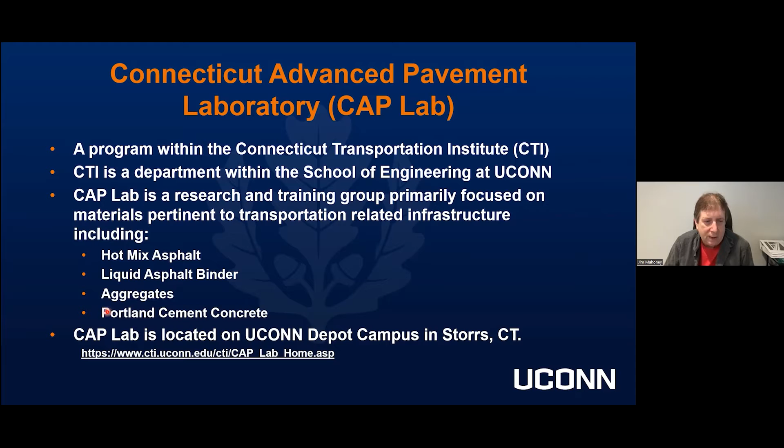So go ahead, Alex. So what's the asphalt industry that we're talking about here? What we're talking about here is these are the folks that produce the aggregates that are used to make our roadways. There's sand, there's stone in it. And these aggregates are used for paving. They're also used for concrete. They're used for a lot of different construction opportunities. And so we have the production of the aggregates.

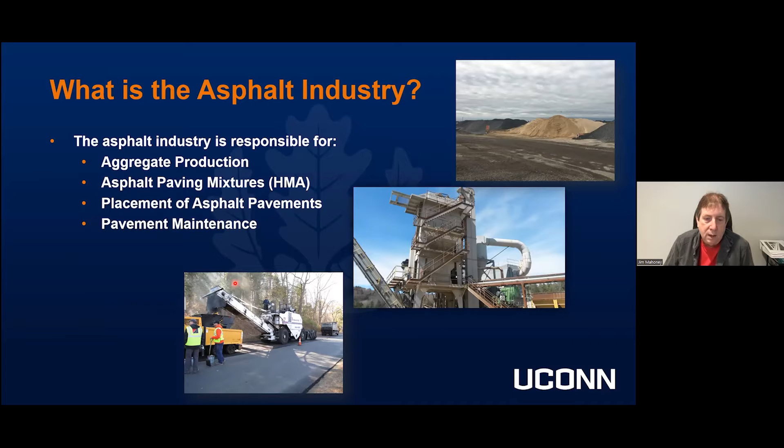And being compacted, and you're actually able to drive over it. And then beyond that, there's also the maintenance operations. So we place this material, and then we have to maintain it over the years to ensure that it is going to hold up and be able to provide a reasonable driving surface. So there's a lot of work that goes into this.

Go ahead, Alex. So just some interesting facts about asphalt. It's the most widely used construction material in the world by at least a factor of 10, if not a factor of 100 times more than any other material in the world. Asphalt's almost 100% recyclable. Not too many things in the world can claim that, but asphalt is essentially 100% recyclable. So therefore, it is a sustainable material.

Another thing people don't really guess is that the actual carbon emissions from asphalt production are much less than from producing concrete. Concrete production to make cement requires a lot of energy, so you have to burn a lot of fuel to do it. Asphalt requires a lot less fuel to produce. Even though we're placing it at about 300 degrees Fahrenheit, the amount of energy required is much less.

Asphalt's also a naturally occurring substance. You can actually find it in rocks and things like that. It is not some manufactured man-made product. It's actually a naturally occurring substance that's been used by humans for thousands of years. Everybody views asphalt pavement as a detriment to the world, but in actuality, we're just using all natural materials to produce our roads.

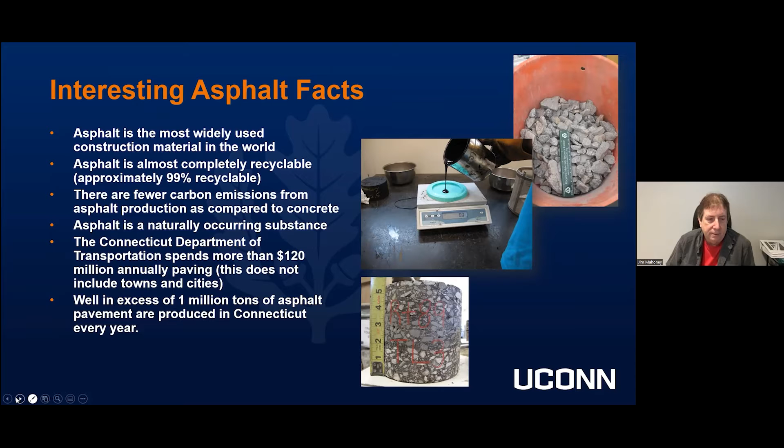It's important to understand that our roadways have to be in good shape because our economy is dependent on that. You've all driven on roads that are in bad shape, bumpy, with a lot of potholes, and that's always a problem. If we want to be able to get goods and services moved with minimal delays, we need our roads in good shape, and that helps translate to a healthy economy.

Imagine if we're so used to being able to order things from Amazon or whomever and have them delivered within a day or two. Well, that's all because we have a good road network, and we need to keep that road network in good shape so that all these products and goods can be delivered and utilized in a timely, efficient manner.

We also want to have good roads because it promotes safe driving. People swerving to miss potholes and things like that a lot of times cause crashes on our roads, which is obviously not good. We want to avoid that.

Just to give you a little more detail on how many miles of roads there are in the state, the DOT in Connecticut maintains close to 4,000 miles of roads, and municipalities maintain 17,000 miles of roads here in Connecticut. And we're a tiny little state, about a rectangle that's 100 miles wide and about 50 miles tall. So there's a lot of roads and a lot of money spent on this stuff.

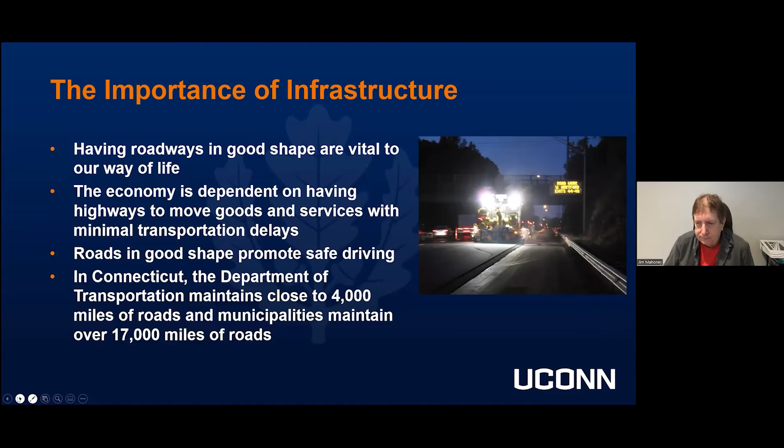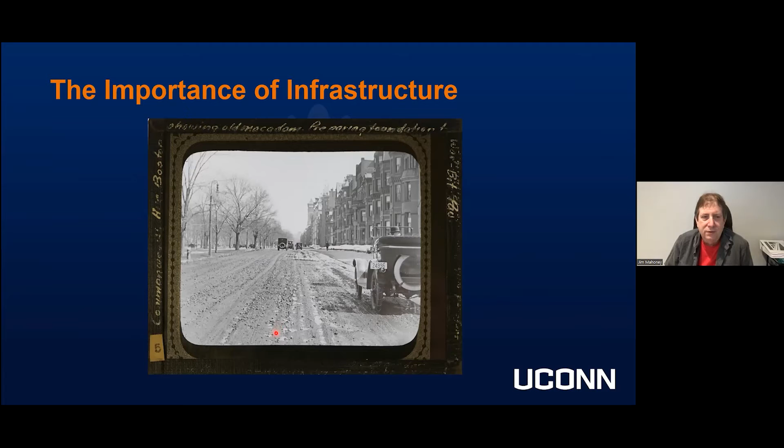They bet who could drive from out in Washington to New York State and get to New York City first. It took the fastest person 91 days. Now if you wanted to drive from here to California, you could do that in 3 or 4 days. But it took them 91 days to go from the West Coast to the East Coast. So it's an important thing, and it takes a lot of money and a lot of time to do that.

So what is asphalt that we're talking about? When you're driving on it, what you're seeing is really a combination of sand and stone held together by the black gooey stuff, otherwise known as asphalt binder. When we produce this, we're mixing these things together, adding the asphalt binder, and creating a mixture known as hot mix asphalt. That's what our roads are paved with.

We want to make sure we're blending those things correctly and putting it down, getting good quality materials out there so the roads will last. Because as taxpayers, we don't like to pony up money to have a road paved only to have it fall apart in 4 or 5 years and full of potholes. So we want to make sure we're getting the biggest bang for our buck that we can.

To give you an idea what a pavement consists of, it's about 90% sand and stone, another 5% asphalt binder, and about 5% air voids. That's what a pavement consists of, and that's what we're trying to ensure when we're doing quality control, to make sure this blending is being done correctly.

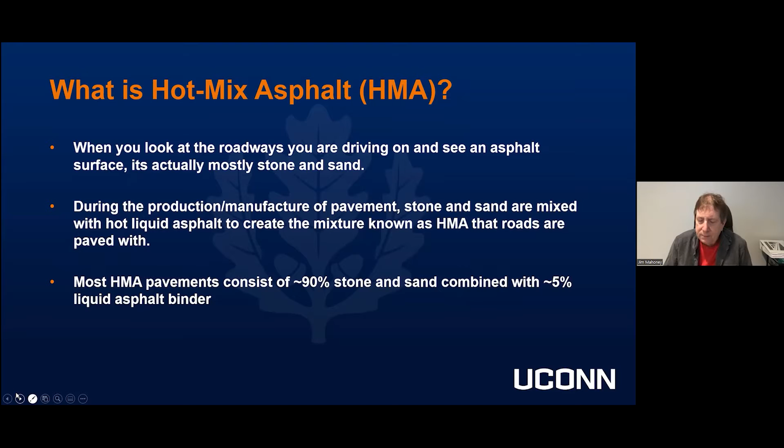And then we allow the road to open to traffic, and therefore we roll forward that way. So there's a lot that goes into this, and there's a lot of opportunities here.

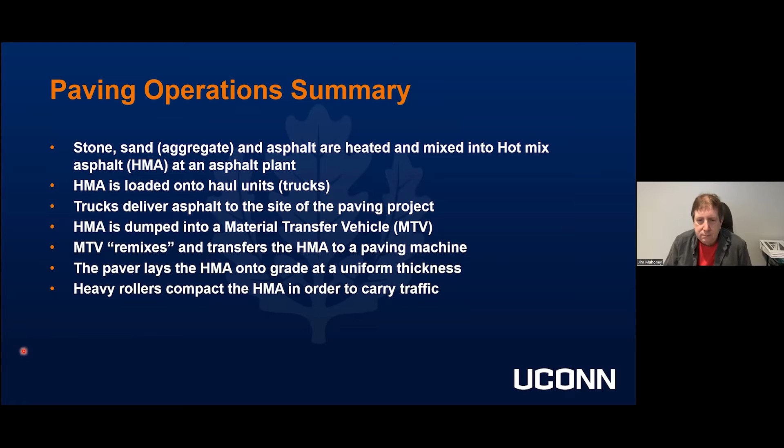I don't know when I'm supposed to drop off, Alex, so just jump in when the time comes. Scott? Oh, this is where I come in? Okay, no, sounds good. Okay. All right, so it's no problem.

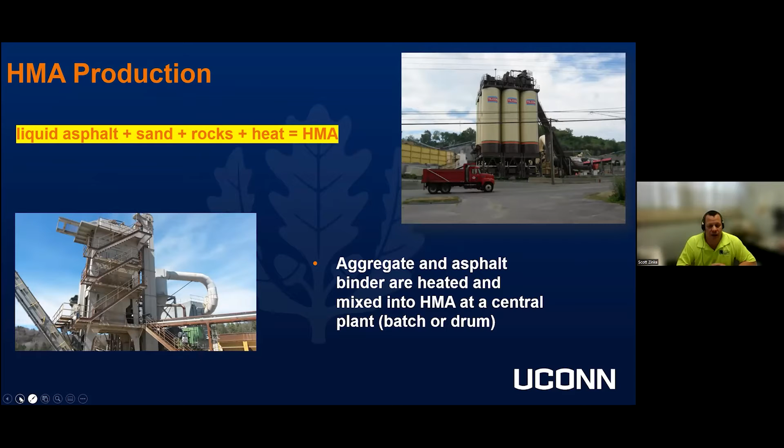Later on in this course, you'll learn the difference between a batch plant and, over on the right-hand side, what's called a drum plant. They both essentially do the same thing. We put in rocks and asphalt and use heat, mix them all up, and what we get out of it is the hot mix asphalt that gets delivered to the job site. They both put out the same thing, it's just that there's a different mechanism, different mechanisms and different functions to get there. But nonetheless, both of these types of plants, this is really interesting, the inputs are the same and the output is the same.

These are facilities dedicated to combining the asphalt binder, liquid asphalt binder, and the sand and rocks, and then using heat to dry those materials out and ultimately heat them up to get them to mixing and compaction temperature.

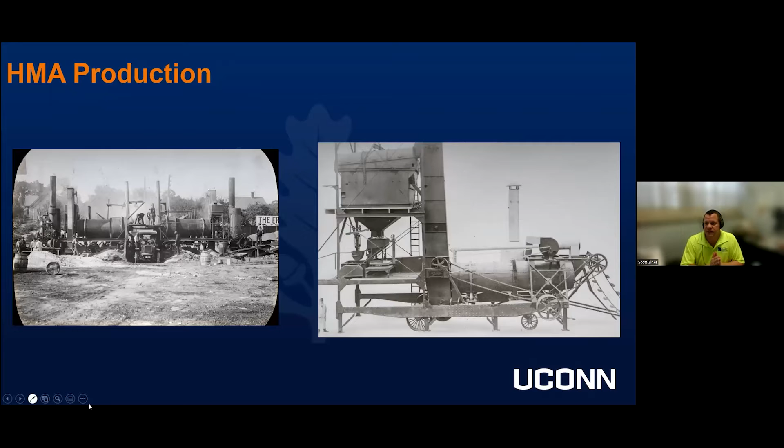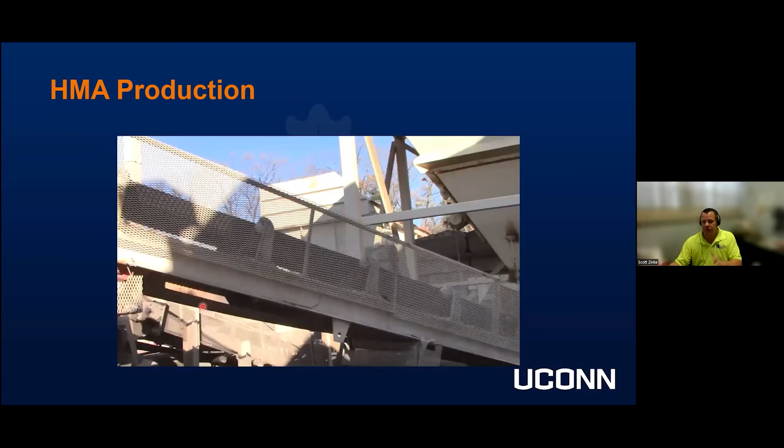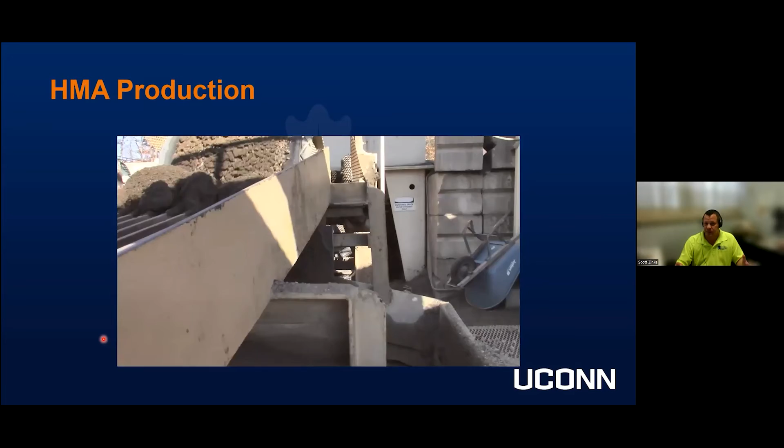There's a lot of different elements to these production facilities. If you take a look at how the stone, aggregates, and everything moves through the facility, most of the actual production is dealing with the aggregate, the stone, the sand, and the fact that it has moisture in it that needs to be dried out and heated up to really hot temperatures, in excess of around 300 degrees.

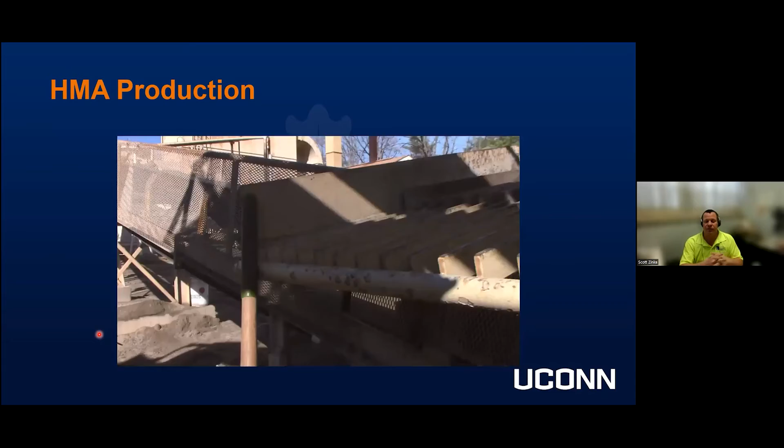We can't just have a bunch of sand and stone thrown into the mix. It's got to be the right proportions prescribed by a design process. If we don't get the correct proportioning, we're going to end up with an HMA pavement compacted into the field that simply won't last.

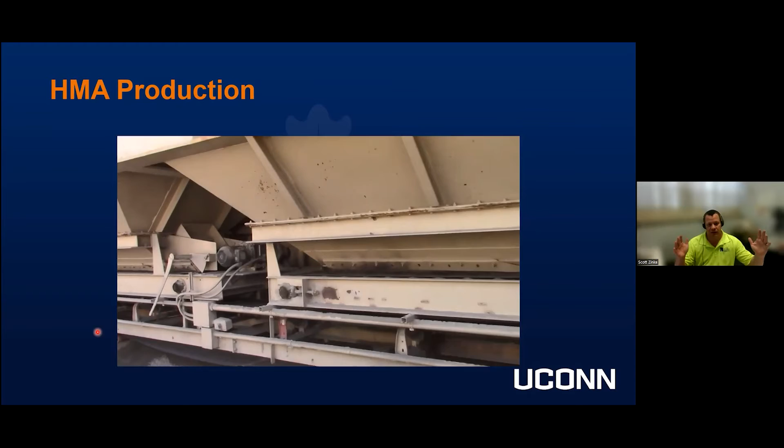So we design these things, and we are dependent on these production facilities. You're looking at the outside of the aggregate delivery system of the plant right now. If we don't get the correct proportions, if that plant can't be depended on to put everything together the way we need it, we're simply not going to get a roadway that lasts.

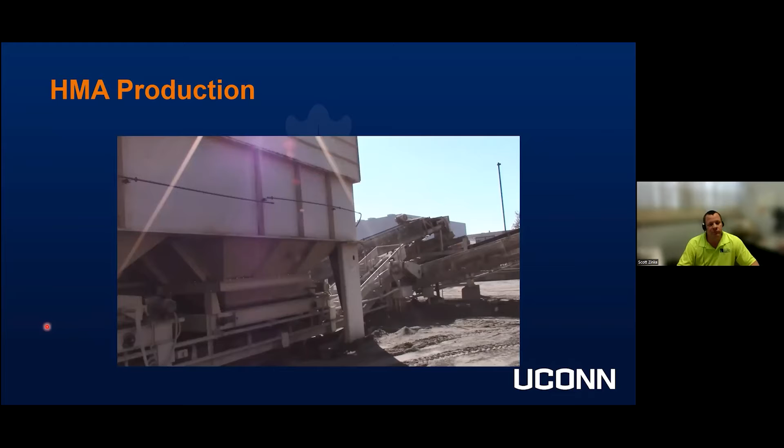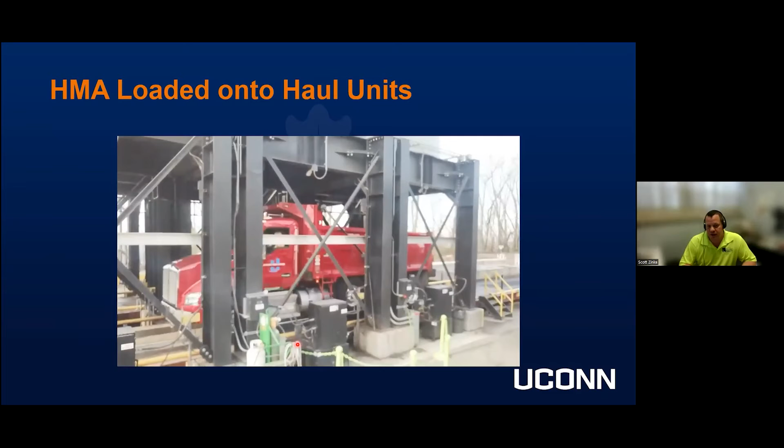We're going to get into more detail about the actual production of HMA, but once the material is produced, it's loaded into trucks. It can be loaded out of what's called a pug mill at a batch plant, or from a silo at a batch plant or drum plant. There are these huge tanks. What you're seeing right here is what's called silo loading of a truck.

Generally these haul units—and I'll use the terms haul unit and truck interchangeably—what you're seeing here is that mix that's been manufactured being loaded in its hot state into a truck.

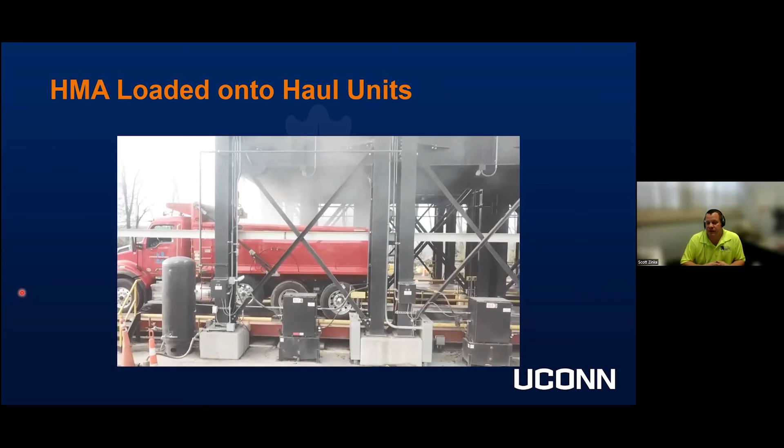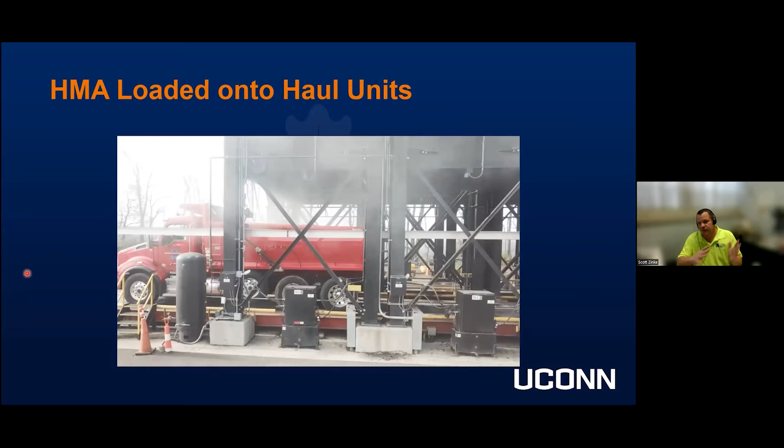What happens with that mix is it gets loaded in what's called a three-step or three-drop process. This does a couple different things: it distributes the load in the truck in a better manner, and it creates a situation where when that truck body lifts up and the material dumps out, it tends to break together and force a little bit of reblending of the mixture.

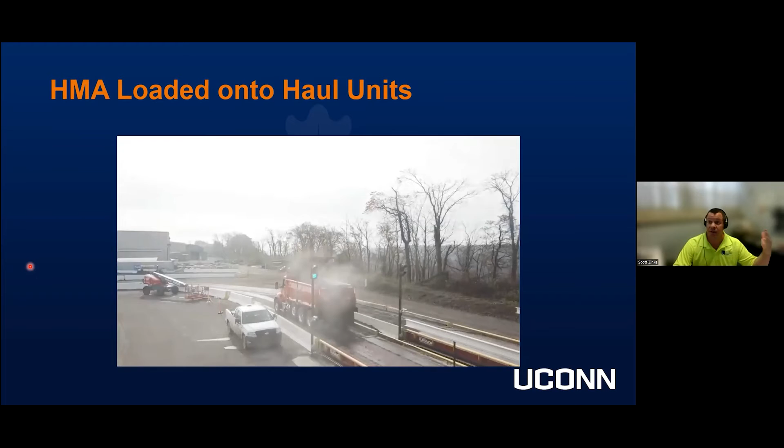So we don't end up with what's called mixture segregation, which is another aspect we're going to talk about later on in this course. That truck you're seeing just leaving the plant is headed out, going to haul that mix out to a paving project.

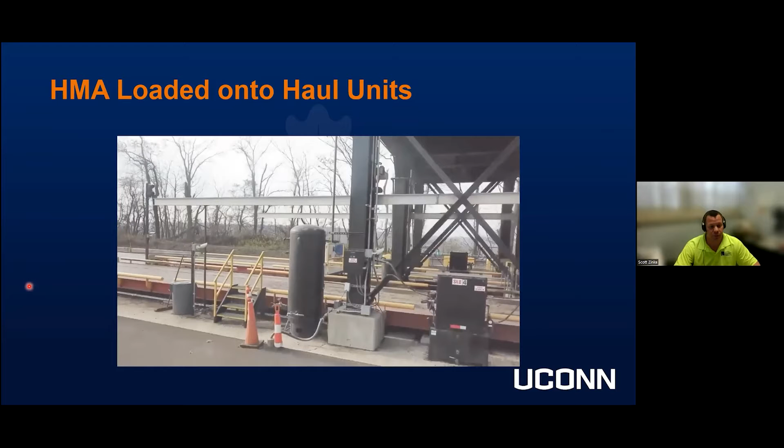There's the sheer mass of all of that material. What you're looking at is in excess of 20 tons of hot mix asphalt in the back of that haul unit. And asphalt tends to retain heat very well.

It's not perfect, but nonetheless, it retains heat very well. But there's a couple other different things that play with these haul units to try to retain the heat until we get to the compaction portion that we're going to talk about in a little while.

What you noticed in the previous video was there was a tarp that comes over the bed of that haul unit to try to retain some of that heat, so not all the heat is lost, okay?

And there's also what are called heated bodies, where the exhaust, believe it or not, is channeled through the bed of the truck. That exhaust is vehicle exhaust, and so it's hot, and that creates a little bit of heat.

It's a mechanism by which we can minimize the amount of heat loss from that material, so that when we get it to the job, it's still hot enough to be put through the paver, and ultimately put down and compacted in place to the point where we want it.

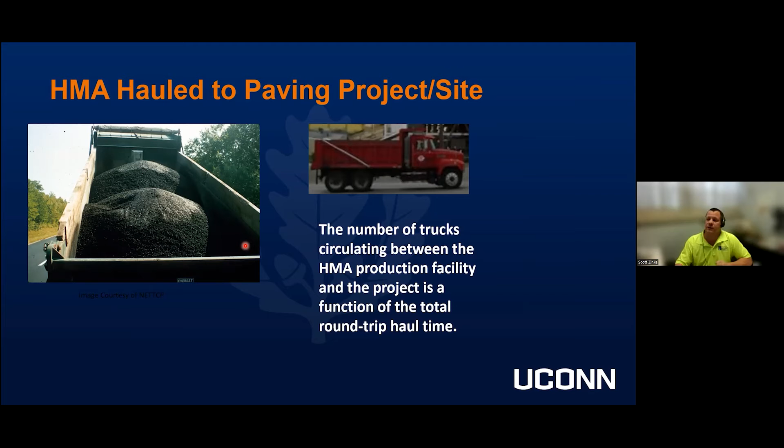You may have as few as 3 or 4, all the way up to as many as 20 or more haul units on a single paving project. And each one of those haul units has its own driver. So that's just another indication of the number of people it takes for this process to take place.

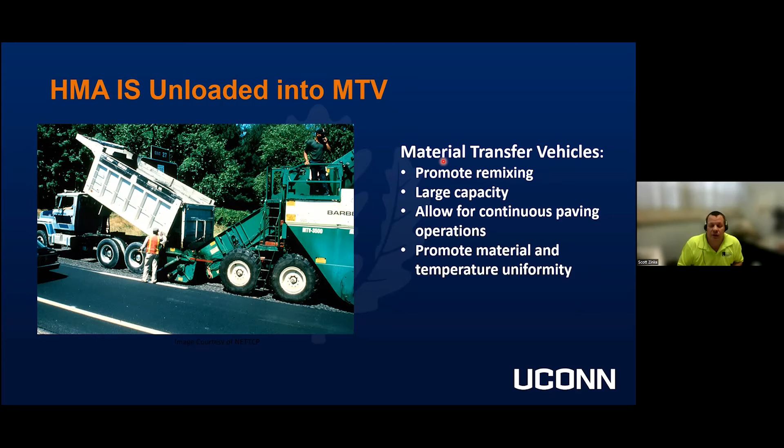And you're going to see a slide later on that shows you the difference in actual temperature uniformity between a project that used a material transfer vehicle versus one that did not, in which the truck dumped directly into the paver.

Another thing, and this is a good image here, what you're seeing is the truck dumps directly into the material transfer vehicle. And what you'll notice is that the material transfer vehicle does not touch the paver. That's called contactless paving. With contactless paving, the screed, where everything comes out, which I'll talk about in just a minute, maintains its elevation.

If we have an end dump situation, which is not ideal, where the truck dumps directly into the paver, the screed tends to lift up a little bit or dip. And every time a truck comes into contact with the paver, that creates potential for a bump in the pavement, which is not desirable. We're looking for a smooth, dense, and uniform pavement. So the material transfer vehicle is part of that operation, and it's a really important part of that operation.

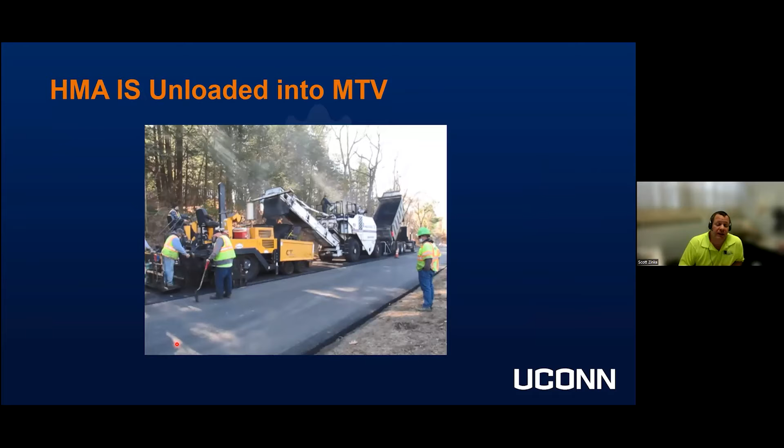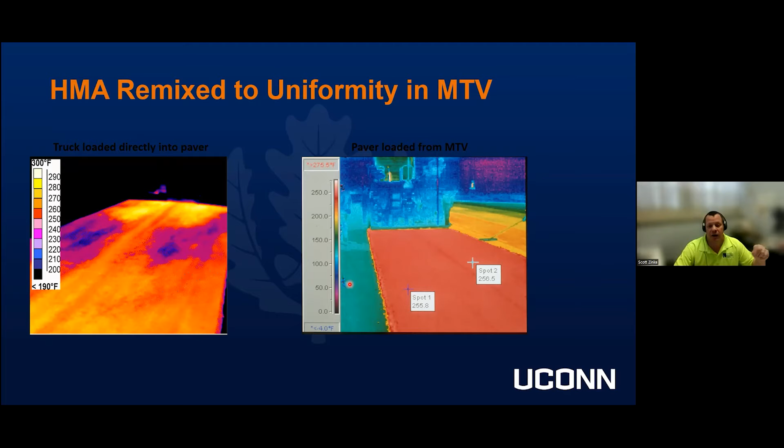So you end up with a situation where if you're trying to find the beginning of one load and the end of the previous load on one of these projects, you really can't see it. That's because the remixing properties of the MTV have caused that temperature uniformity, which is very desirable. It gives you a much smoother, more uniform pavement because you don't have those cold spots.

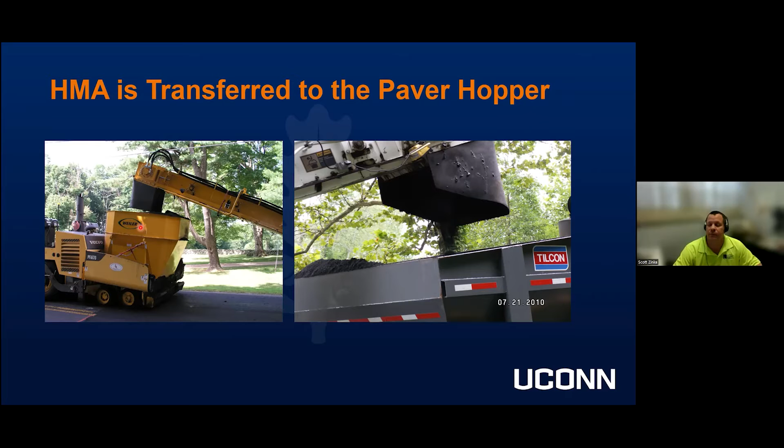Ideally, this paving project would be fed in a constant manner so that the paver never has to stop over the course of the paving operation, unless it has to pull back or it's at the end of the project. Hopefully it doesn't have to stop and wait for a truck, or for any reason other than backing up to tie in another pass. If it never has to stop and never has to come into contact with a vehicle, ideally that screed will stay at the same elevation and you'll end up with a much more smooth pavement at the end of it.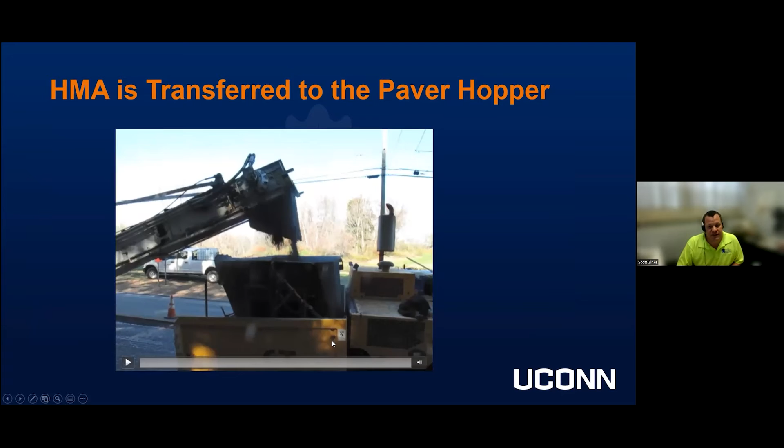So this is just showing you a video of material being delivered from the MTV into the insert, which is chained into the paver hopper. That's the paver that you're seeing directly, and on the left-hand side, that's the boom from the MTV that is handling that delivery.

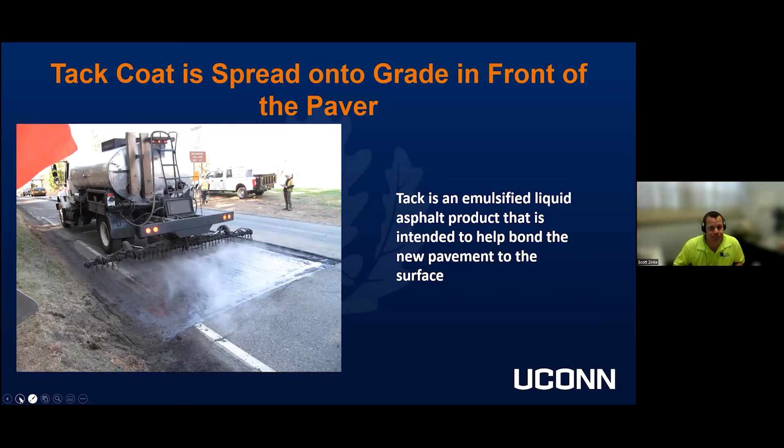So what happens with the material as it's delivered to the paver? There are drag slats that pull the material to the back of the paver, and augers that help to spread that material out to the width of the paving pass. Then ultimately there's a screed, which is what leaves it in a uniform manner.

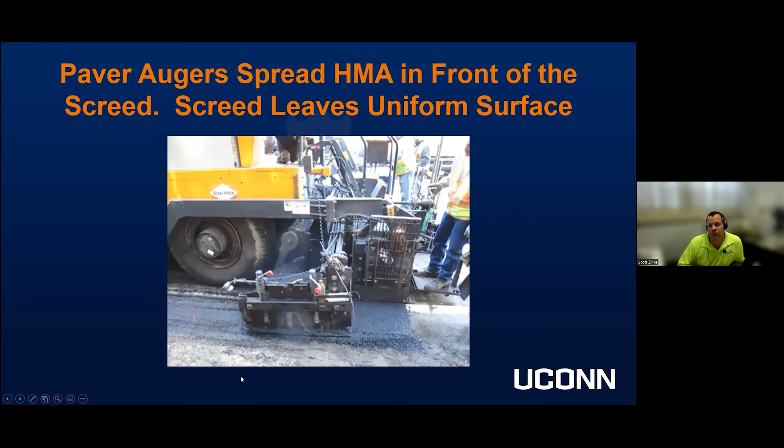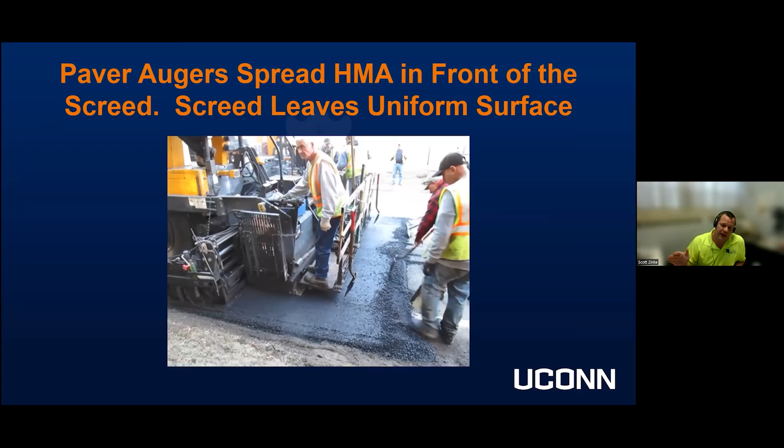What's left directly behind the paver is uncompacted, but nonetheless it's smooth and uniform, so that when the compaction unit, the rollers, come and hit it, they can compact it.

That screed consists of a couple different things. There's a screed plate on the bottom that helps smooth everything out, because the pavement is essentially being left in a pile in front of the screed. The screed basically screeds off that head of material, helping to leave it flat and uniform in a manner that the rollers can hit.

Another thing going on with the screed is that it can be heated, which is crucial at the beginning of a project while all the equipment is still cold. That way the pavement doesn't stick to the screed itself, which could cause a tear in the mat. It's also equipped with a vibrator, which gives a little extra compactive effort prior to the application of the rollers.

Ultimately, prior to the application of compaction equipment, you end up with an asphalt mat that's approximately 70 to 80% compacted. So the rollers come in and finish that compactive effort, leaving you with a roadway that is smooth, dense, and uniform, ideally.

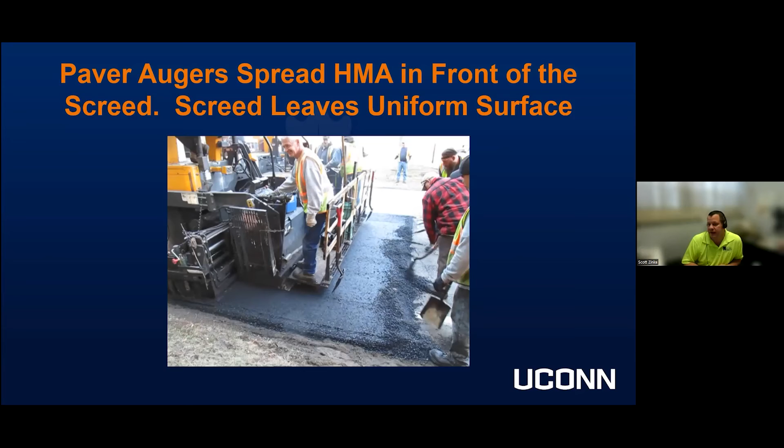This is what the mat looks like directly after the paver, before what's called a breakdown roller hits it. A breakdown roller is typically the heaviest roller you have on site, and as far as the work rollers do in achieving density, the highest level of densification comes from that breakdown roller.

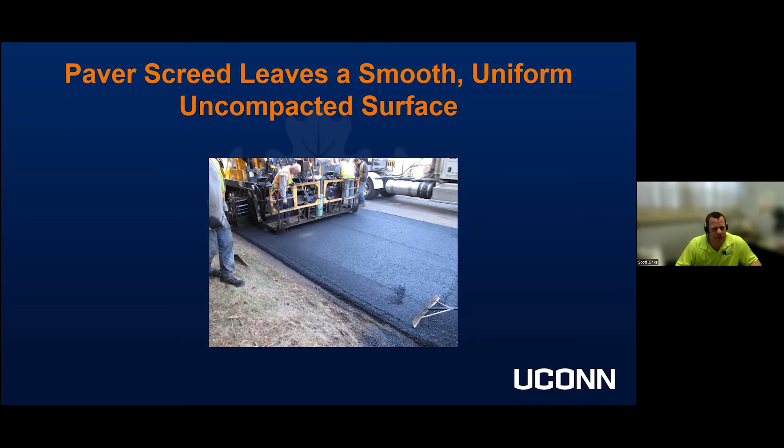There's generally two or, in a lot of cases, three rollers on a project to achieve the final level of density. The first roller is called a breakdown roller, and that's where you're knocking that uncompacted material down to the point of compaction.

There's potentially an intermediate roller as well, which continues that compaction process as the pavement cools down, densifying it as much as we can. Then ultimately there's the finish roller, which is simply intended to smooth out any imperfections in the mat before it finally cools to the point where we can't do anything with it.

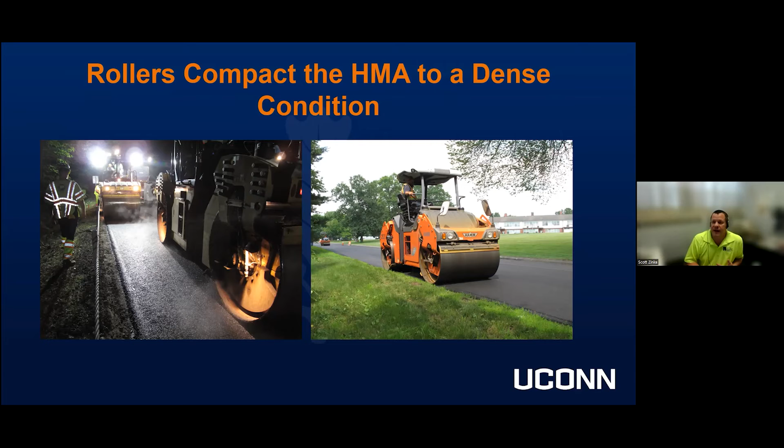Generally, these rollers decrease in weight from breakdown to intermediate to finish roller. A finish roller can be as small as 2 or as many as 5 tons. An intermediate roller can be a lot heavier than that, and some breakdown rollers we see are as much as 20-ton double drum rollers, which can function in either vibratory or oscillating mode. Those modes give us the highest level of compactive effort while the material is still hot, so we can achieve the highest density prior to the application of traffic.

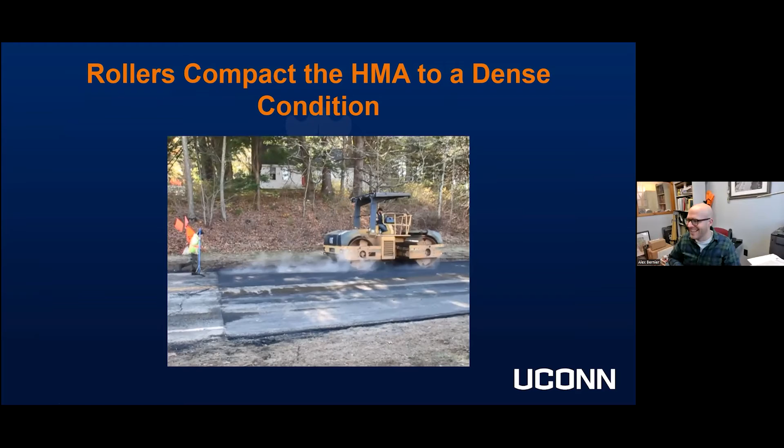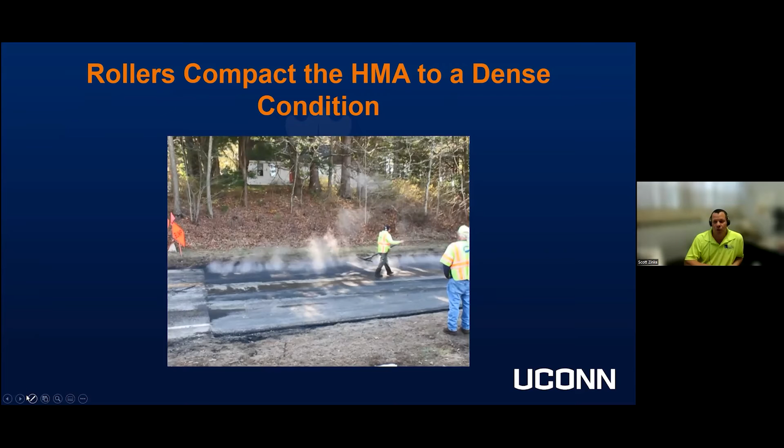This is a breakdown roller. You'll notice the steam coming off the roadway. The paver just left that area, leaving behind a hot mat ready to be compacted. The steam comes off the mat because the roller utilizes water—there's an even sheen of water over the roller wheels, and the reason for that is to cause a cooling effect on the steel that keeps the pavement from being lifted up or sticking to the roller.

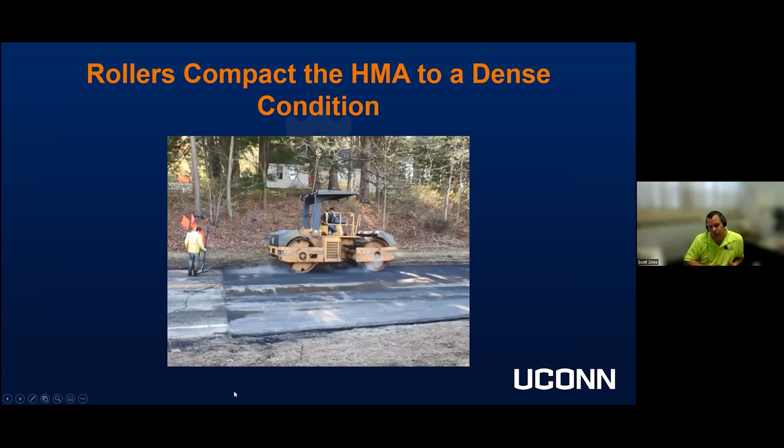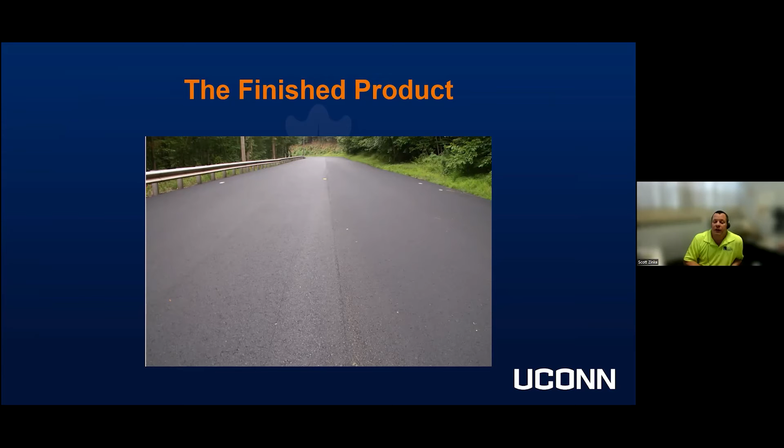Okay, and ultimately, the goal, if everything went right—and it takes an awful lot of work and an awful lot of people and effort to get here—we end up with a smooth, dense, uniform pavement that is going to support the traffic loading we're going to apply to it, and also provide a smooth, comfortable ride to the motoring public, and hopefully last for a long time.

Thanks, Scott. So that's the production of pavement and what pavement is. Now I'm going to talk a little bit about why quality of pavement is important. We're primarily giving you the background here for being quality technicians, whether you're doing a role as an acceptance inspector or a quality control inspector.

We'll get into a little bit more of the difference between those two, but know that acceptance is whoever's buying it, where the money's coming from, and the quality control person is working for whoever is making the product—that's usually a contractor.

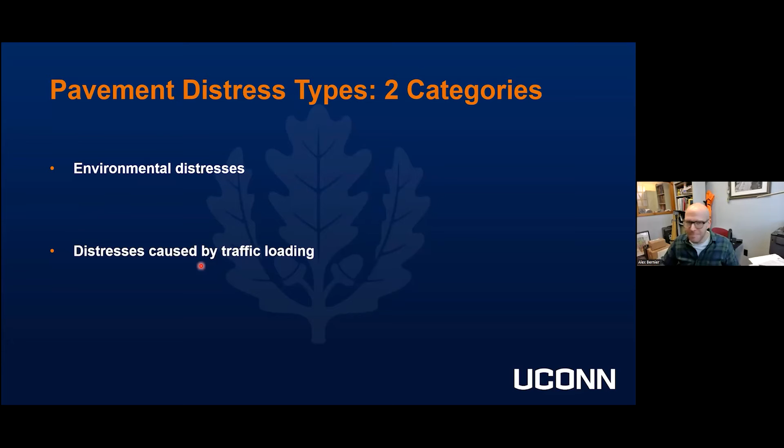But the quality we're talking about with a pavement refers to environmental distresses or traffic distresses. We use the term distresses because it's not just cracking that is a problem for our pavements. There's friction concerns, which is a huge one—you don't see it, so most people driving don't think about that all the time. But if the road does not have friction, you will know it very quickly and it will be a very dangerous situation. So friction is one of those distresses, as well as rutting, which we've all kind of experienced near intersections where you've got deformed pavement. Anyway, I'm getting ahead of myself—I've got slides for that.

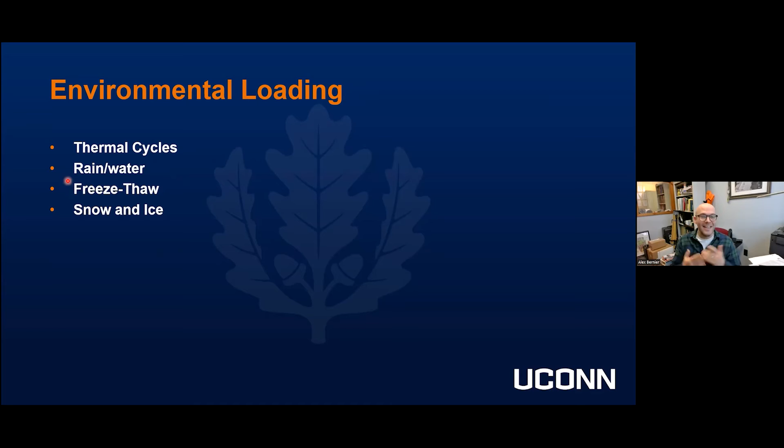Environmental loading is one of these first factors. And the reason this is so important for pavement is because asphalt, the glue we use, the black sticky stuff, changes its characteristics depending on the temperature outside. When it's really hot, the asphalt is actually more flexible, and when it's really cold, it behaves more like a solid that could be cracked. You might have experienced this yourself—if you've ever been in a parking lot on a very hot day and stepped on crack seal, you've noticed it's kind of gushy. That's the asphalt becoming more soft, or having a lower viscosity, which we'll get into in another session.

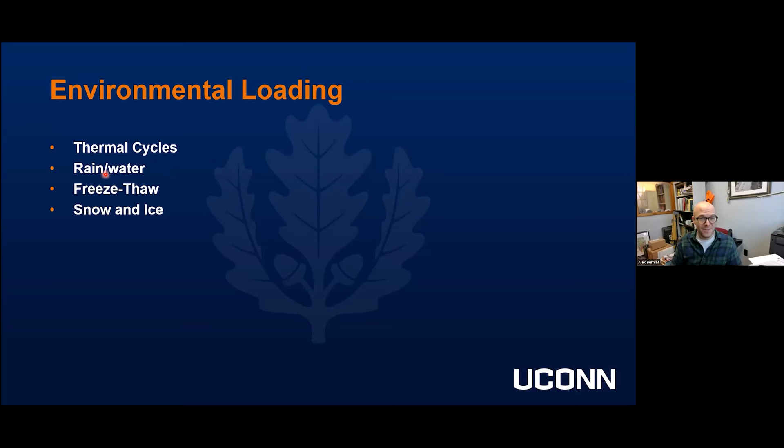The other example is in cold weather, that's when pavements are prone to thermal cracking, or non-load-related cracking at low temperatures. So from an environmental standpoint, there's thermal cycling, which has to do with the nighttime and daytime cooling in the pavement. We've got water, which is always a problem for any type of infrastructure we build, whether it's a house, a bridge, a dam. Pavement itself can be damaged by water. Then we've got freeze-thaw cycling, which is related to water—if there's just freezing without water, pavement will actually last longer, like in the Midwest of our country. And finally, snow and ice: even though there are forces when that freezes in the pavement, there's also distress that happens when we plow it. There are certain types of plow blades we can change up to protect the pavement a little better, but in certain cases you might have seen roads being scraped up or damaged by just maintaining our roads in the wintertime.

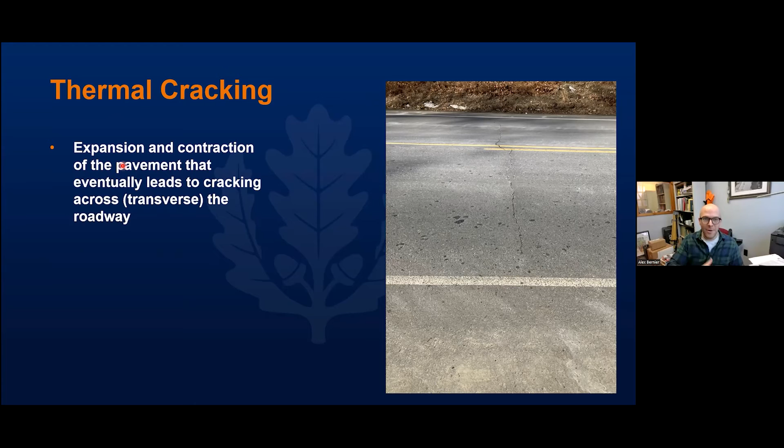So thermal cracking is the expansion and contraction of the pavement from a daytime to nighttime situation. If asphalt never oxidized—meaning it aged or became more brittle—this wouldn't technically be a problem for us. But the asphalt itself degrades over time just because it's a naturally occurring material. If you put a banana outside, you can't expect that in 10 years it'll still look like it did when you put it there. Asphalt is similar because it's naturally occurring, so it degrades, and when asphalt degrades it becomes more brittle, meaning it's more likely to snap or crack. Eventually this thermal cycling from daytime to nighttime, over and over again, affects the pavement and actually changes its shape, which will eventually lead to cracking.

Pavements that are not designed or built correctly usually crack more. You'll also tend to see thermal cracking more on lower volume roadways. One of the crazy reasons for that is on a higher volume road, the vehicles driving over it are actually helping drive the pavement down into place, making it less likely to have thermal cracks. The way we know a crack is a thermal crack is when it goes across the pavement. When it goes down the wheel paths, that's usually caused by traffic.

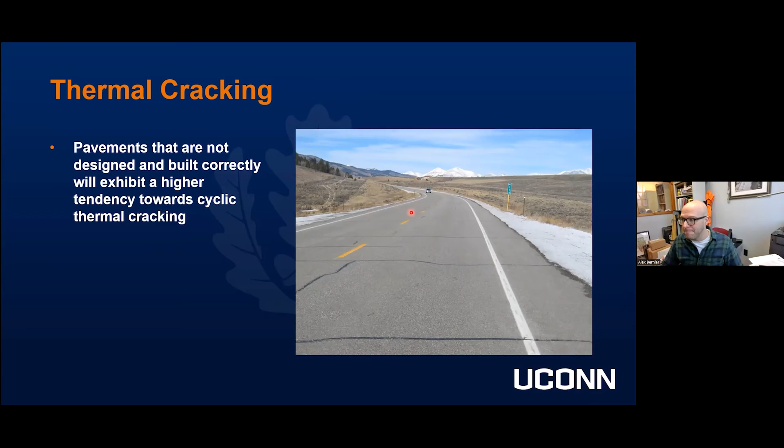Freeze-thaw cycles are when something freezes and then warms up. That's happening quite a bit these days. It's actually ideal for people who make maple syrup, but for those of us who maintain roadways, it's less than ideal. What happens is we've got micro cracking or small voids in our pavement left over from construction, or that have progressed through time. Water gets in there, freezes, and drives them apart over and over again. The more that happens, the wider the cracks get and the more rapidly our pavements degrade.

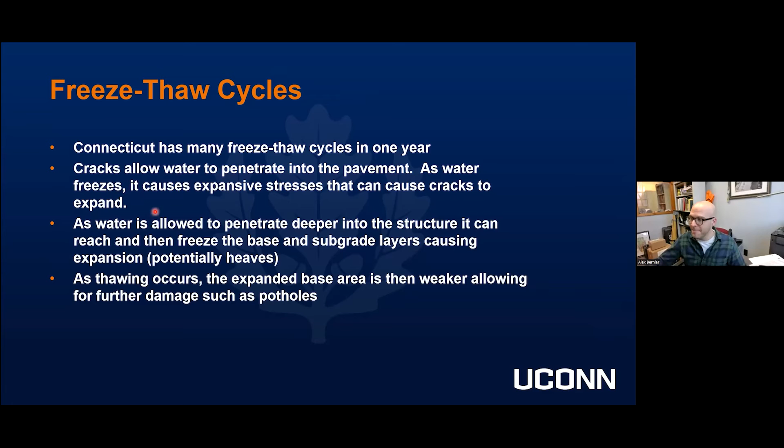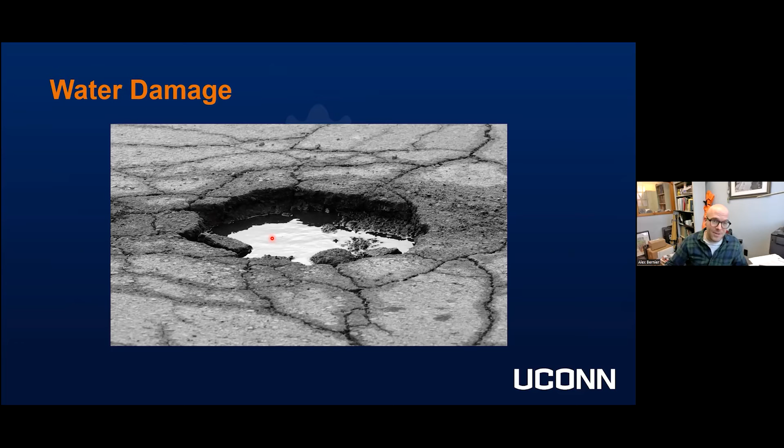Here's a prime example of one of these freeze-thaw distresses. We've all probably hit one of these recently or driven around them. I was elated yesterday because our town did some pothole repair on our road, which I had been driving around to avoid. These are not great to hit with your cars. Actually, I think it's like $60 billion estimated annually in distress caused on people's cars by poorly constructed pavements in our country. Maybe it's 6 billion, 60 sounds high.

Water, as I mentioned, isn't just a problem through freeze-thaw. Because asphalt is naturally occurring, it has a lot of chemical challenges we deal with in our industry. As QC technicians, we aren't directly making decisions about the chemical additives put into the asphalt liquid, but asphalt and water both have these magnetic forces, and with certain aggregates, the water can make the asphalt peel away from it. We call it moisture susceptibility or stripping. It might be hard to see depending on your screen, but there's actually stone in these samples that have no asphalt on them after this testing.

That's an example of a moisture susceptible pavement. This type of failure will happen in 3 to 5 years if you're not protecting for it, but there are additives that people can put in. That's one of the tests a QC technician would run to make sure the materials aren't going to be susceptible to this.

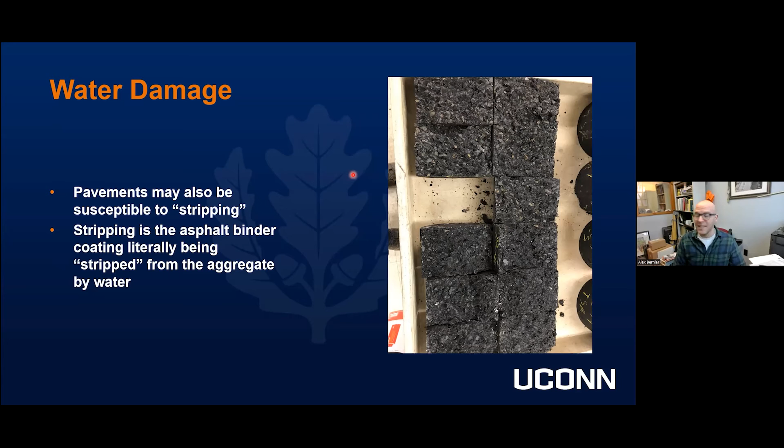Traffic loading is probably the easiest thing to conceptualize: the more that goes over a road and the heavier those things are, the worse it is for our structures. That's why if you drive on the Merritt Parkway versus I-95, the conditions of that roadway are generally better because there's no truck traffic, or there shouldn't be. Trucks are exceptionally more damaging to roads than our cars, and we'll get into why later, but the heavier a load is, the worse it is. That's kind of intuitive, it's how snowshoes work in a sense, we distribute our weight more and stand up on the snow more.

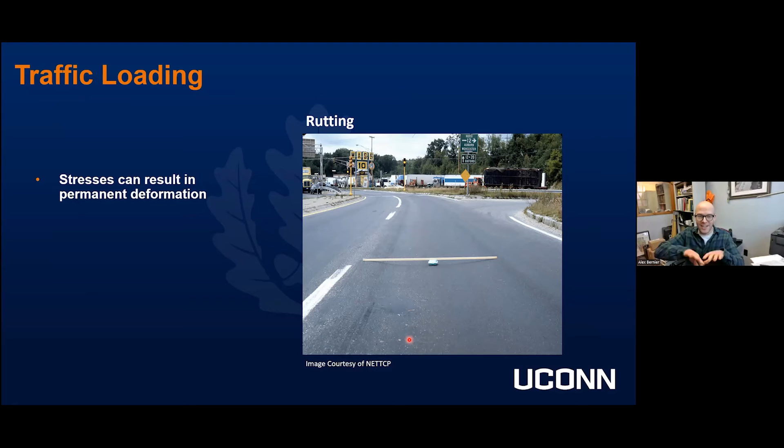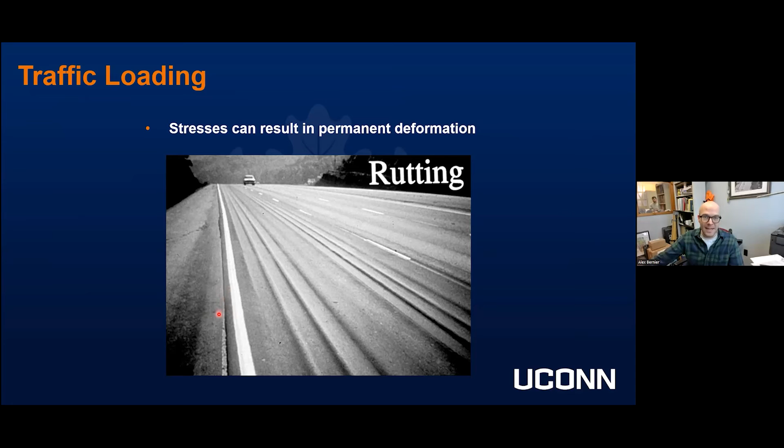When we have higher loads, that can manifest as rutting, which is the deforming of the pavement. It's like dealing with Play-Doh or clay, you push on it and it doesn't come back, it actually changes shape. That's called plastic deformation. Rutting is extremely dangerous because water can pond in those ruts and cause hydroplaning, or in weather like today, it can cause freezing. In either situation, cars are not going to be in control by the operators.

That's because with this type of material, the same thing would happen with steel and many other materials, but that type of failure is from repetitive load. Even one load, if I bend this pen a little bit, it's not going to break, though it's hard to see that I'm deflecting it. But if I do that over and over again, maybe 1,000 times, it will break this pen. The same thing happens to pavement.

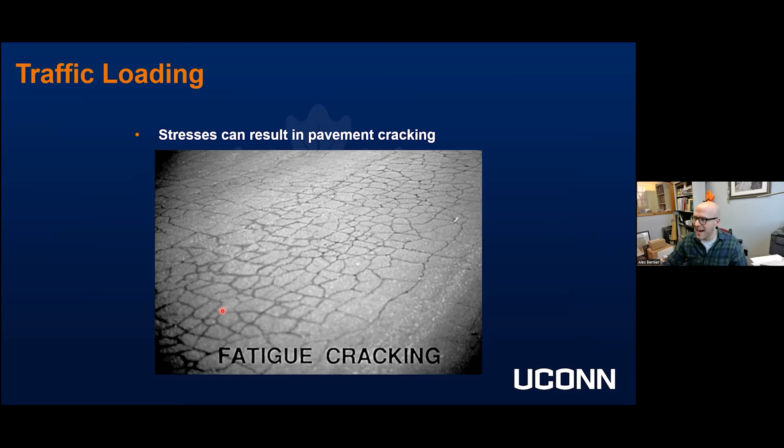So quality control is really important. It's intended to ensure that the asphalt being produced and placed meets specification requirements, and what we mean by that is it's a contract. Whenever a contractor does work with a state or a town, there's a written contract between them saying, I will do this, you will pay me that. There's a lot more than just those simple words, including how to make and place the asphalt.

For example, in the state of Connecticut, there's a document called the 816, the state standard specification on construction. There's probably, what would you say Jim, 100 pages dedicated to placement of bituminous pavement plus that liquid asphalt. So there's 100 pages of rules.

It's about 100 pages of rules that everyone's agreed upon on both sides of the aisle, whether you're an acceptance inspector or a quality control inspector, that you need to know - is this meeting it, is this not meeting it, and what are the rules. By the end of this course, you're not going to have those 100 pages memorized, but 5 or 10 years into a job in paving, you would have a pretty good handle on that set of rules.

There are certain people who only focus on the aggregate, certain people who only focus on the liquid asphalt. There's a lot of different roles - we've mentioned over and over that for any single paver truck, there's probably close to 24 people supporting that, maybe more depending on the size of the project.

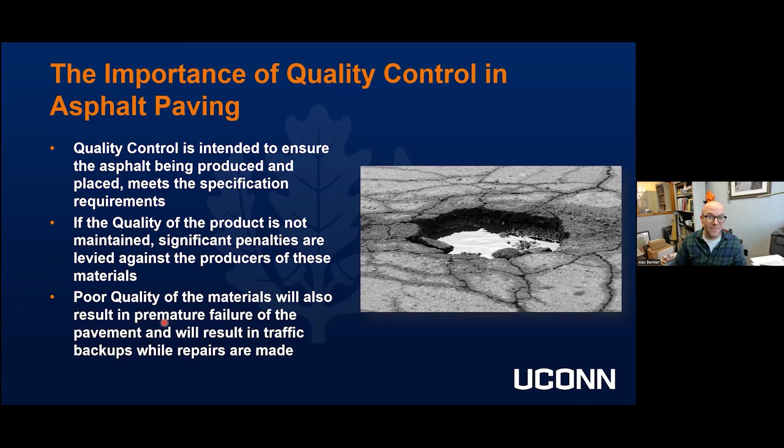If we get 10 to 15 years out of a pavement, that's a success where we live. So quality control technicians serve to identify potential problems by sampling and testing. And the details of this class are going to be: what are those samples and tests?

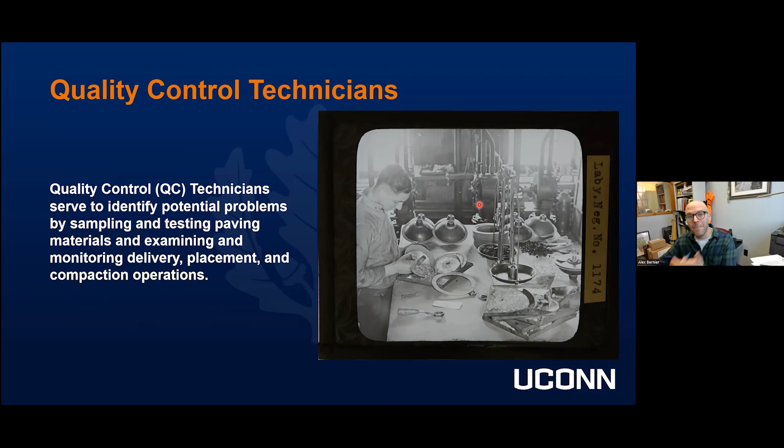Here's a picture of someone in a very old lab doing very similar testing to what we do today. A lot of it hasn't changed, which is kind of cool, but there are new techniques and new technologies that help make it easier for sure. Like this scale here, it probably took a lot longer to weigh something than it does today, where we set it on a digital scale and numbers are displayed that we write down. So very different approaches, but very similar measurements being made.

Kind of interesting. Quality control technicians, and we covered this in the first session for those of you who may have participated, test the quality of the materials against recognized standards. What we're talking about is a test protocol, a procedure. And they also perform visual inspections to make sure that material does not have defects. So there's two aspects to this.

One simple example of running a test protocol is taking its temperature. As we've discussed, temperature is really important for that material arriving on site. If it's too cold, we're not going to get density. So a standardized test is: did I take that temperature right? You could actually take a temperature wrong and make a wrong decision. So we all need to agree upon how we take those temperatures.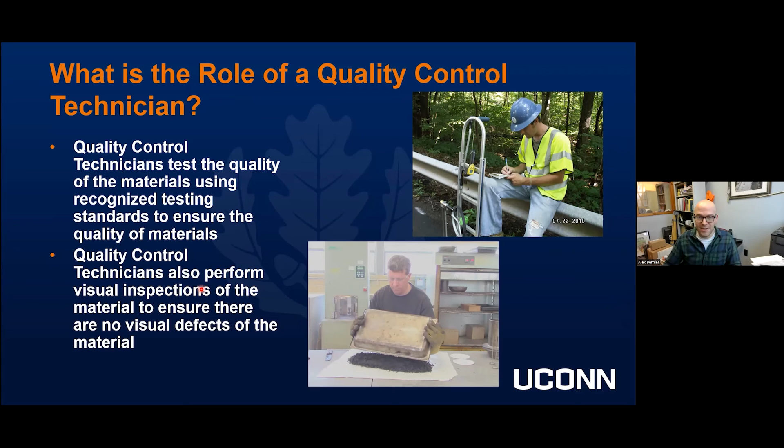And then visual inspection kind of speaks for itself, but there's a lot of experiential knowledge you will get, and we'll present a lot of those problems in this course, as well as what to look for specifically when that mix is not being produced right or being placed right.

Quality control technicians work with their company specifically. As I mentioned, a QC or quality control person works for a contractor or a producer. So they're working with their company to troubleshoot problems, prevent problems, and react, respond, and change the process to make it better. A quality control technician works with an acceptance inspector to make sure the materials are meeting those requirements. On a state project especially, there will always be a state inspector and a contractor's QC inspector, and they work together, right? They're measuring the same thing, but they're looking at it for different reasons.

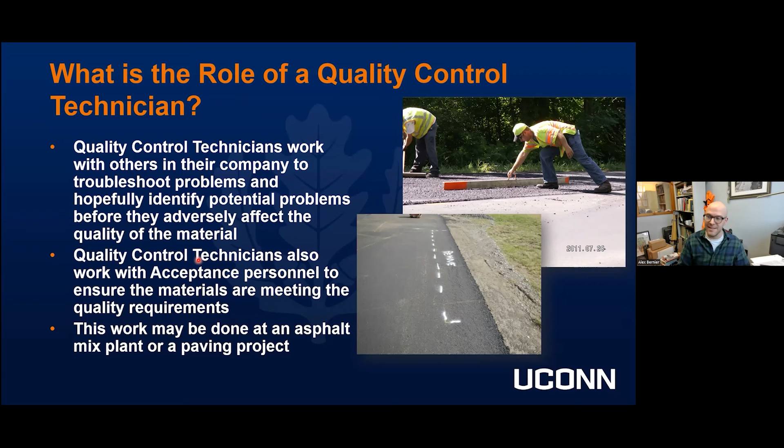This work may be done at an asphalt mix plant or on site. When you're on site, you're going to be checking the samples, making sure the temperature is good, making sure the compaction is proceeding properly using something like a non-destructive density gauge. This one is a nuclear gauge, but they make pavement quality indicators which are non-nuclear. We'll get into a little bit more of those in another session.

And they'll work with the roller operator. Because this is super temperature dependent, depending on the season, the thickness, and your equipment, every time we construct something it's going to be slightly different. And it's really up to the QC who's in the field to help make sure that happens properly.

The rollers could be too close and they might actually damage the pavement if it's too hot while they're trying to get too much compaction. Additionally, if they spread too far out, they might not get enough compaction before it cools off too much. So there's a sweet spot. So much with pavement, I liken it to Goldilocks and the Three Bears, right? Too hot, too cold, just right. That happens over and over again with a lot of the things we're talking about.

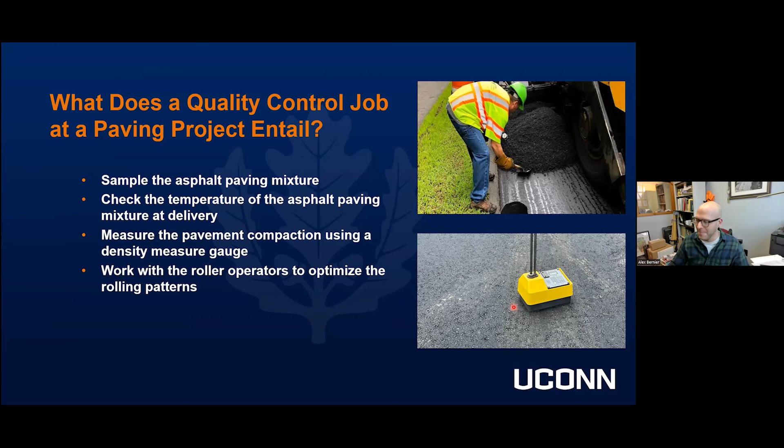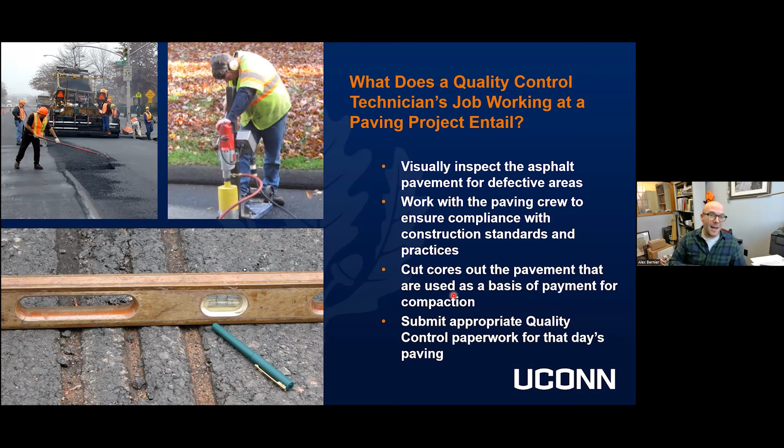So another thing you might be doing is visually inspecting for defects. This person here is causing segregation and low density at the joint. You also might be cutting cores and submitting paperwork. There isn't an extreme amount of paperwork, but every time you run a test, you have to record it—you can't just keep it in your head. So there are standard forms we're all filling out.

I thought I was running a little behind, but that's pretty good timing. Okay, so if anyone has specific questions, feel free to ask them or type them in the chat. That's my timer—no, was that a bell for a class? I'm not sure.